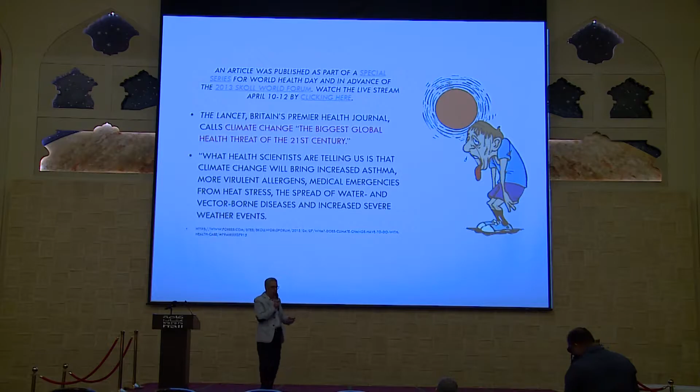So we were supporting the municipalities with our technical work, while this consulting office working with them, GHD I think they're called, were more focused on theoretical issues. Both our technical work and their theoretical issues created a very nice report for the municipality to consider in their recommendations for future development in Doha, taking into account the change of heat.

Here, what they say is that climate change is going to be the biggest global health threat of the 21st century. So a lot of heat, what can we do with it? Humans have a problem. If you look here, I made this chart also with my research team.

Usually when you think about temperature, we always look at hot, mild, and cold. In fact, it's not like this. There are 5 different degrees of heat. The first one we can call cool, when it is below 18 degrees. Between 18 and 24, call it the comfort zone.

Some people may say 25, this is okay too. Comfort zone is when you don't need air conditioning and you don't need extra clothes. You can sit at home very nicely, you can walk outside very nicely. This is a time like March, April. So this is 2 different zones of temperature. The third one is called the hot zone, from 28 to 38, 10 degrees. Sorry, I missed one here.

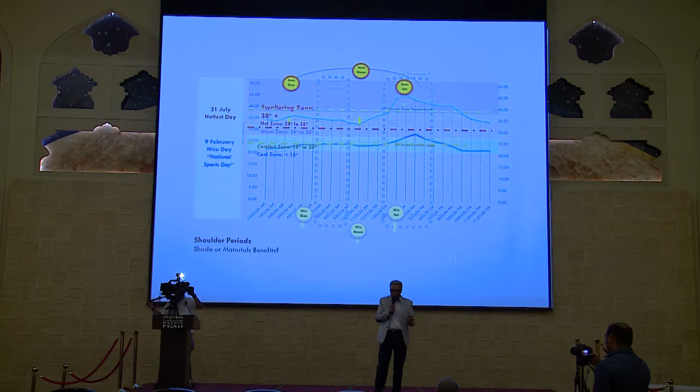Between 24 and 28, we have the warm zone. It's warm. You may have a fan to survive, you don't need to have air condition, but everyone has air condition at home. They prefer to turn on their air condition for more comfort because they are used to it. However, some people might prefer to use a fan only to survive this kind of temperature.

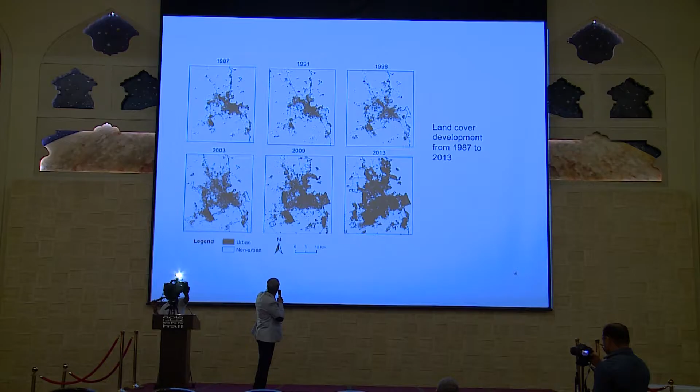Now the fourth one is a hot zone, which is from 28 to 38. Here we use air condition right away. This one will not be a threat to our health because the heat of our body is around 37 maximum. It can tolerate and really work and survive with up to 38 degrees.

However, when it goes beyond 37 or 38, we go to another zone, number 5, called the sweltering zone. Then we get sweat, and the body has to look at mechanisms to really reduce the heat of the body. This is going to be the dangerous zone for everyone.

From that study, actually, we decided to go right away to create our own strategy for the research. And we had actually 3 points here.

Understanding of the influence of the built form and human activities on microclimates. Why microclimates? Because we are mostly walking on the street within districts, so we have to deal with urban districts, not on the city scale. Every part of the city has a different urban district, and we found out every urban district has different heat, different temperature. You may have a difference between one district and another of probably 5 degrees, 4 degrees, 2 degrees, etc.

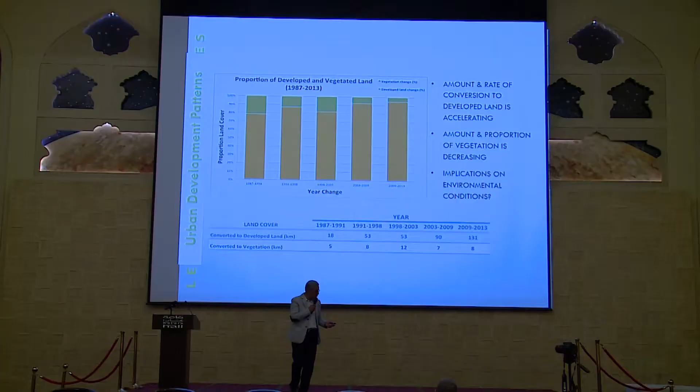Actually, the study has a number of phases. I'm not going to go through all of them, but the interesting thing is now we selected 10 areas, different areas distributed all over Doha. It was a weather station to take temperature for the whole year, for 1 year. From there, we did some calculation to find out how the temperature has been distributed in the city.

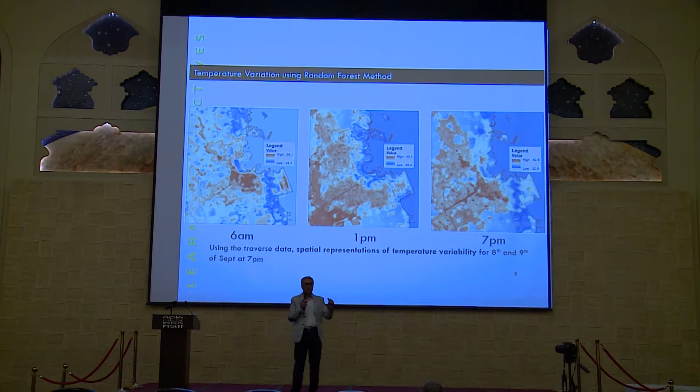So we had some study, some maps for the same day, September 8th and 9th. We have the morning, the afternoon, and the evening. You can see, for example, here the maximum heat was 36, while here it was 29, the lowest, the blue. You can see the heat island is located almost in the downtown, where the Museum of Islamic Art is.

This is where it is, like Msheireb, Souq Waqif, and Najada area. The airport also creates one of the heat islands and so on.

When you move into the middle of the day, we can see the heat island almost less here in this area, more towards the industrial area, as you see it here.

In the evening, we go back close to this coast or Corniche, there is also heat. But surprisingly, you can see this road here, this is Salwa Road. It's always represented as a heat island within the city itself. It's called the corridor heat island.

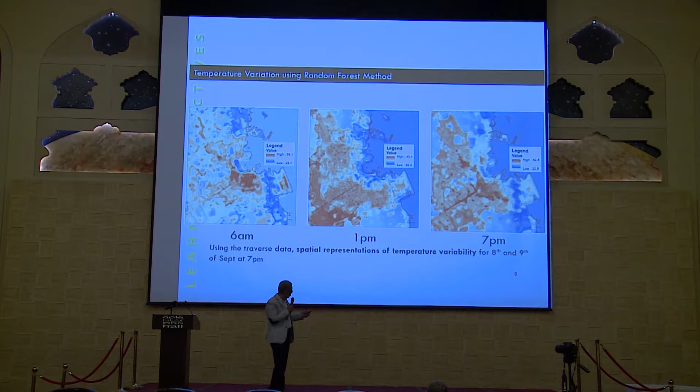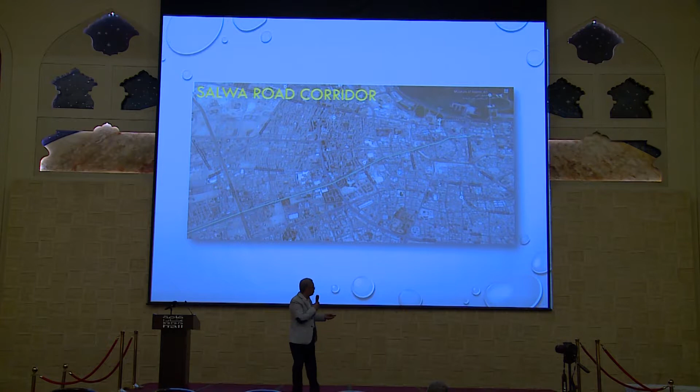So the study here, I will present two studies. One looks at the corridor of Salwa. Another study will look at two different neighborhood districts and how we're trying to propose some improvement to reduce the heat on those neighborhoods. The Salwa Road, as you see, this is the location of it.

Start from the shore, this is the Corniche, all the way inland. Usually this is the way it lays out, and this is where the wind also blows throughout the day. Mostly the prevailing wind came from this direction, the same direction.

You can see the road has different land use, and this is a map of the land use, the legend of the land use. Around it, there is all type of related activities.

We did the traverses. The traverses here refer to the car. We put the temperature recorder on the car, and we drove on that road, on the side road. We didn't try to ride in the middle of the road.

The interesting thing about this study is when you do traverses, that means we are trying to look at the heat related to the pedestrian more or less, not the car driver and the car. Why do we need to do that? Because we're trying to see how people experience the temperature when they walk on the streets.

So we had 3 traverses per day: in the morning from 6 to 7, in the afternoon from 1 to 2, and in the evening from 7 to 8. And we did it on 2 different days, Friday and Tuesday.

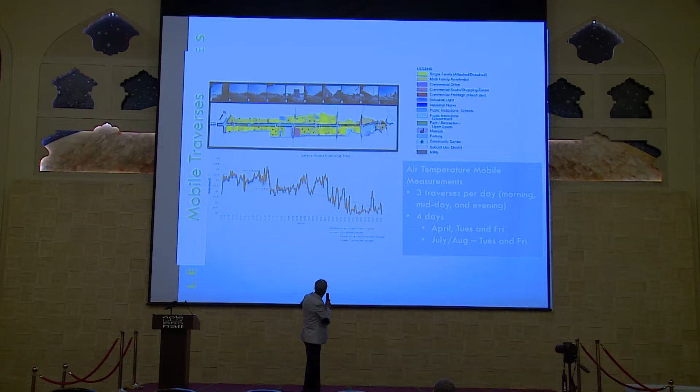You can see the temperature here really differs from the beginning to the end of Salwa Road. This Salwa Road has been divided into segments. Every segment is 100 meters, as it is.

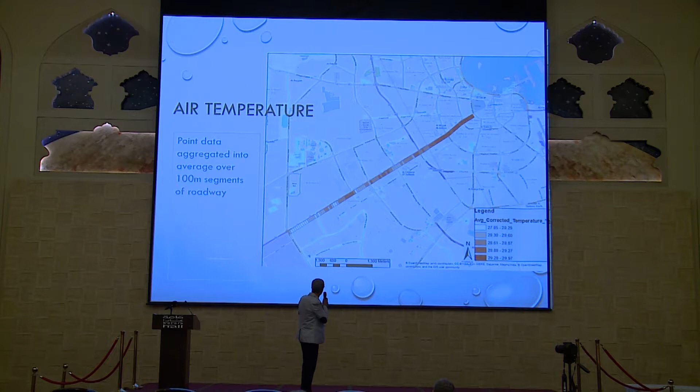Second, what is around it? We take buildings in depth on both sides, 200 meters and 400 meters. We have to study both cases.

And we look at the traffic, and we put traffic counters at different points, mostly at the intersection points, cross roads. We counted how many cars are passing those areas.

Also, we take into consideration in our study the distance to the Corniche. It has to be a straight line distance to the Corniche.

So the result of the study was very fascinating. Usually people think that everything close to the Corniche is going to be cooler than inland. However, the study showed it's not true all the time.

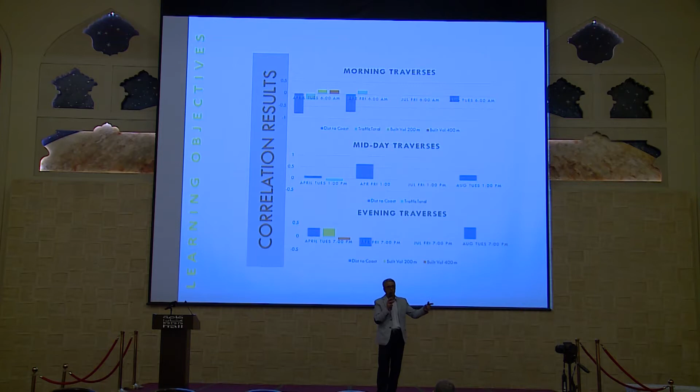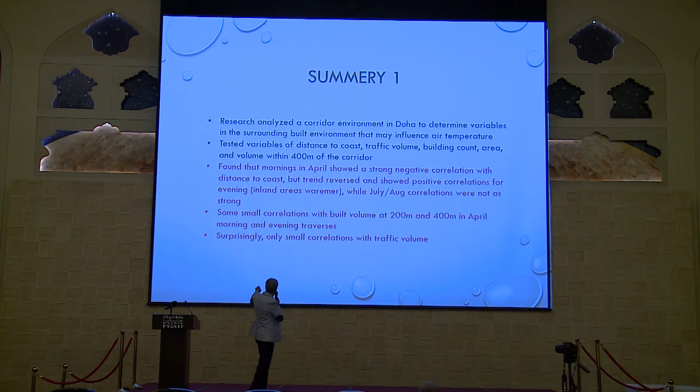Just a quick summary of what I've said so far: we found that the morning in April showed a strong negative correlation with the distance to the coast, but the trend reversed and showed a positive correlation for evening, with inland areas warmer. Second, there was some small correlation with volume at 200 m and 400 m in April.

Surprisingly, only small correlation with the traffic volumes. Again, I'll say there's really little significance for the traffic because of the width of the road, and we are not really studying the middle of the road - we are studying almost the pedestrian side. We are caring here about the user who walks on the street.

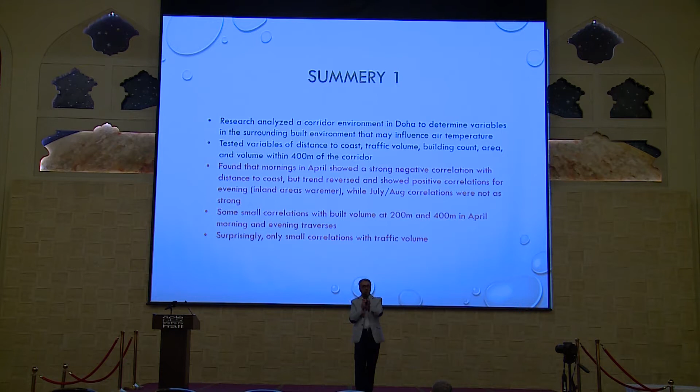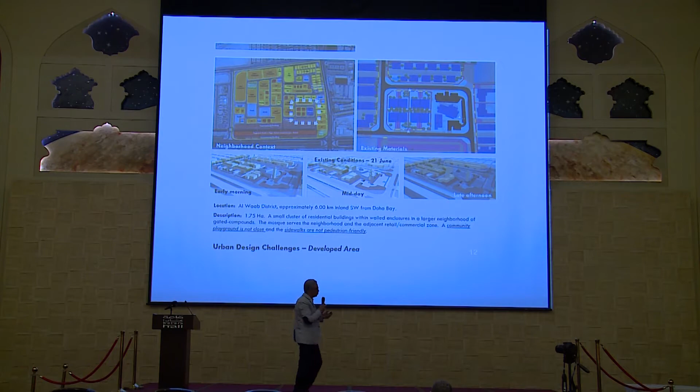Now the other study looks at the district. We selected actually 3 districts - here I'm representing only 2 districts. One district is a fully developed district, just at the beginning of Salwa Road. It's Al-Wa'ab district, approximately 6 kilometers southwest from Doha Bay. This one we used to call the Mercedes roundabout, just behind it - this is the area where we have this district.

This is when we did the study of the full district, and this part we put more emphasis on in our study. If you look at the materials used there, and the 3 perspectives of the place, it shows the sun shading on those 3 different perspectives.

We did some proposals for that district. We said even though it is fully developed and the temperature is very high, we have to change some parameters. One parameter changed was to gray paver - so any pavement here, we move it from asphalt to gray paver. And for the pavement for pedestrians, we found in our study that if it has a green color, it will reduce the emission of heat from that surface.

Second, we have masonry concrete perimeter walls and installed green planting. So instead of having a fence of concrete, we always replace it with hedges to be green, also to reduce the reflection of the heat.

The last one, sidewalk, also we suggest some trees to be there.

The second case, this is some of the perspective of that neighborhood. You can see how it was and how we are proposing it to be, with some greenery and changes of the pavement color and so on. From the perspective, you can see it's more livable, more inviting, comparing with the previous one.

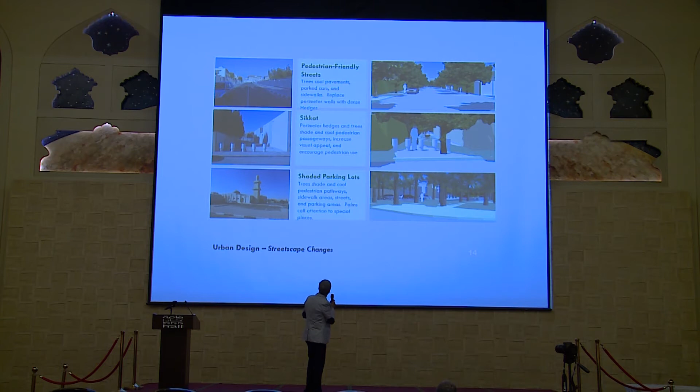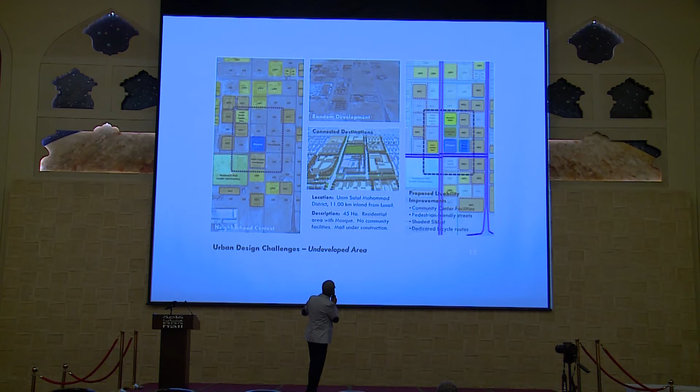The second case is actually we took Umm Salal, where there is a district less than half developed. That means the land is mostly empty with some buildings. Beside it there is a mall, Boulevard Mall I think it's called, which was under construction at the time we did the study. I think now it's finished.

In this study, we decided to do development for the undeveloped areas to encourage people to do street activities, like riding bicycles, meeting outside in a cafe or in an open area, a small green area, etc.

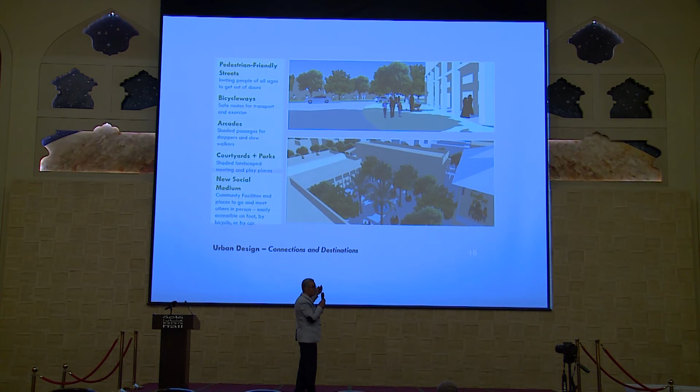So we have here pedestrian-friendly streets, that's what we're trying to propose: bicycle ways, arcades where people can walk away from the sun, courtyards and parks. So all the building developments have to create a kind of courtyard to create a really nice microclimate.

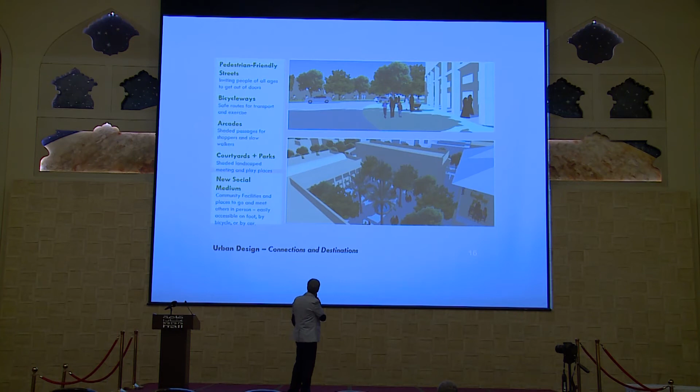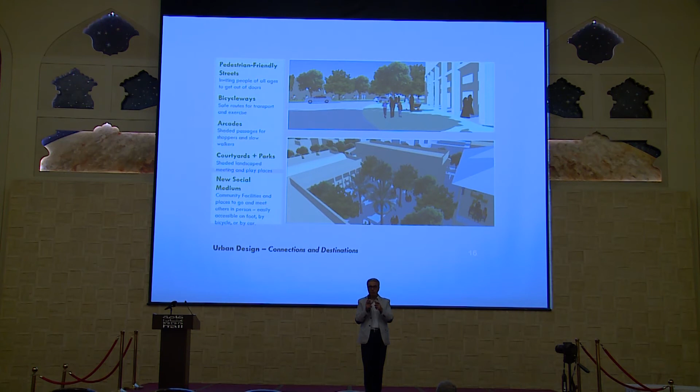A new social medium, so create community facilities and places to go and meet others, etc. In the neighborhood itself, just houses usually isn't good enough to encourage residents to go walk on the streets. So we have to create commercial activities, parks, or recreational spaces within the neighborhood, so there is a reason for people to get out of their houses and walk outside. Once they walk outside, socialization will start there.

Now, as a summary from this second case, we emphasize planning for future growth to ensure efficient, convenient mass transit where conditions permit walking and bicycling more. We don't need people to always be encouraged to use a car, so there is either walking or riding a bicycle if possible. Also, the second point is trying to switch away from fossil fuels.

Even though we wrote this in the presentation, I was in the United States, in California or Portland, and they now have a policy: by 2023 or 2024, the city says all cars, or 50% of cars, have to be operated by electricity. By 2030, all cars have to be operated by electricity, none operated by gas, just to make sure the car is not going to be a source of pollution for the environment.

I think Doha will follow this trend very soon, because it's kind of a trend like using a cell phone, everyone has a cell phone. In the future, everyone will have a car operated by electricity, so by default this problem will be solved.

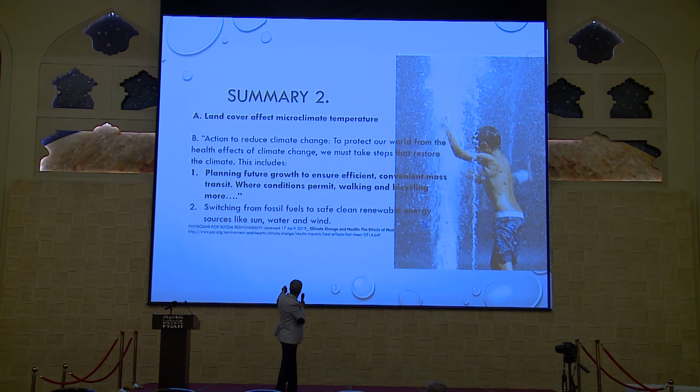More to add as a response to this study: we have to put emphasis on the eco district and find out what variables can be changed to improve the temperature in it. The temperature usually comes not only from cars or air conditioning, but the material also has an albedo effect, and the color you use for the building and for the pavement has to be taken into consideration.

Okay, I think that's it. We have to pay attention more to vegetation also, the last point. Thank you very much, I hope you enjoy the presentation. Thank you.